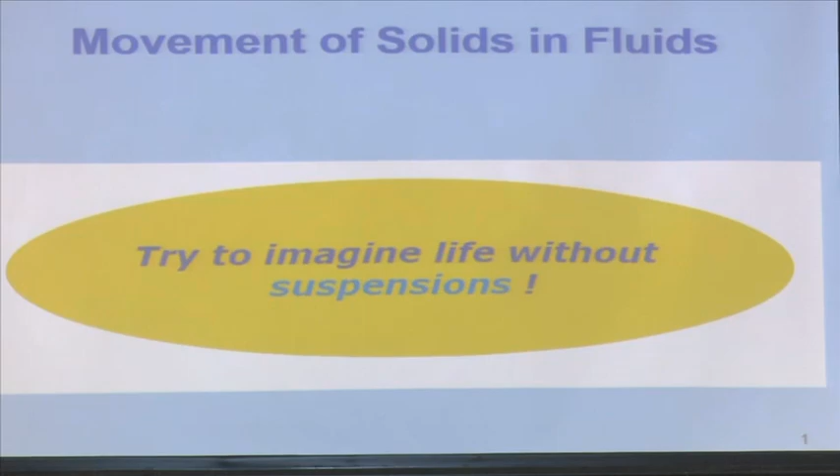If I do not understand this, I do not understand how any separator works. There is a bit of fundamentals, that is the physics behind it, but my focus will be more on what kind of models I should select for calculating properties of the solids in fluids. So, to give you a broader sense of the areas of application of this topic, I would like you to imagine your life without suspensions. Probably at one go you are not able to understand what I mean, but in the next slide I will try to show some examples, broad areas of application of suspensions.

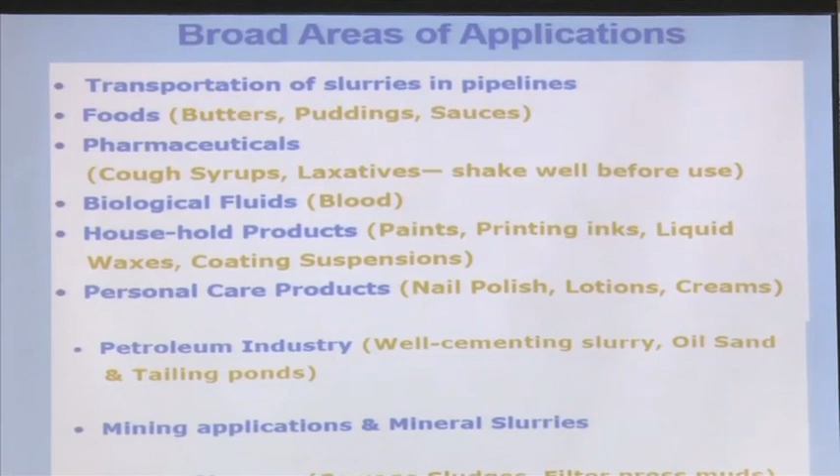Transportation of slurries in pipelines. What are the basic requirements? If I want to transport material from one point to another through a pipeline using a fluid medium, the particles should not settle. Otherwise you cannot transport it, you will have difficulties.

Foods like butters, puddings, sauces. When you have sauce, why is there an expiry date? What happens to the sauce? You will find that the particles have settled, and you are having a solid liquid separation, but you do not want that. So what I am trying to say is that we are also essentially dealing with some kind of suspensions there.

Look at pharmaceuticals, as we discussed one day, cough syrups, laxatives, shake well before use, shaking is required to bring it into suspension.

Even look at our biological fluids, blood. Blood is also transporting particulates, we have got WBC, RBC, and all this. I will show you in the next slide also, and the one after that.

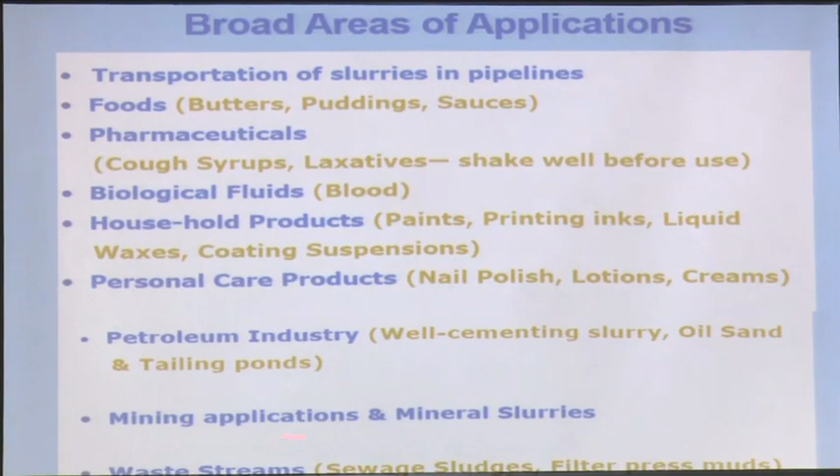Household products like paints, printing inks, liquid waxes, coating suspensions, everything has to be a suspension. So the essential thing is that particles should be in suspension, but how do I make them suspended if I do not know the physics of movement of solids in fluids. Personal care products, nail polish, lotions, creams, petroleum industry, I can keep giving examples, but our domain is mostly on mining applications and mineral slurries.

Okay, so we will come to that. Before that, I will try to show you what Professor Suman Chakravarti was talking about yesterday, pump and pipeline systems. In processing industry, we need pump and pipeline systems mostly for slurry transportation. How do I send my material from one unit to another unit? We need a connecting tool, that is the pipeline.

So, in the form of slurry, that means a mixture of solid and fluid, I give this analogy to our processing plant with our human system. Even our human system, I will say it is a mineral processing system. If I look at it, probably you remember my introductory lecture on mineral processing. Now we are taking food. In terms of processing industry, we call it feed, doing the same thing, feeding our system, that is our food.

Okay, now what do we do? If we do not have teeth, if we do not crush them, what will happen? There will be choking. So now we are basically trying to liberate, or we are trying to do size reduction with our teeth. And you see our jaw, probably the name jaw crusher has come from this. I do not know the history of that, but probably I am guessing. So we are doing the same thing, but if you just keep it between your teeth, nothing will happen to a solid particle.

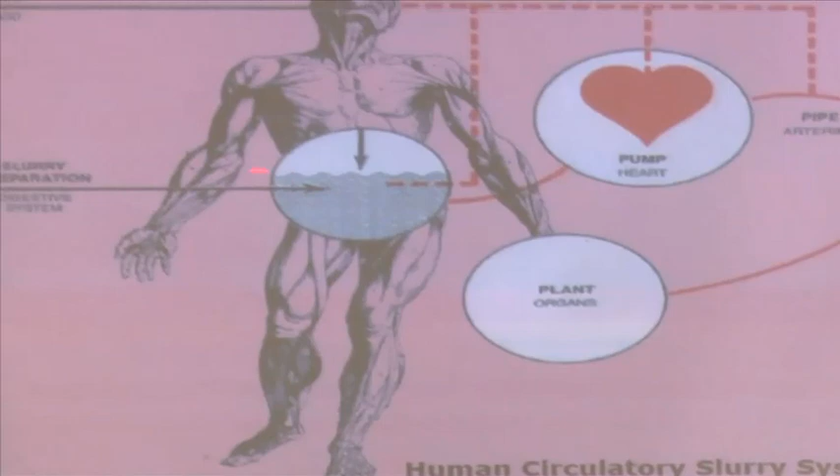That is what we call a slurry preparation system. Let's suppose I have to add chemicals for my flotation process, and I want to ensure they are properly mixed. Normally we use a tank and a mixing mechanism so they are properly suspended, and then they are fed to a particulate separation unit. That is called a slurry preparation unit.

Our digestive system is also nothing but an analogy to this - here we add chemicals in terms of some acids and enzymes to help complete the process.

We have fixed some residence time for a particular type of material, so it is automatic. We want to bring this automation into our processing systems too - that is our challenge, what we call modern plants. But our body already has an automatic system.

If there is a malfunction in any system, we go to doctors - they repair it. They are nothing but engineers too. They play with our human body, we play with machines. So it is also a machine.

Then what happens? Then you pump it. Material has to be transported. Some material is transported because of gravity, that is fine. But what is my transporting channel? It is my arteries and all this. Where is the energy coming from?

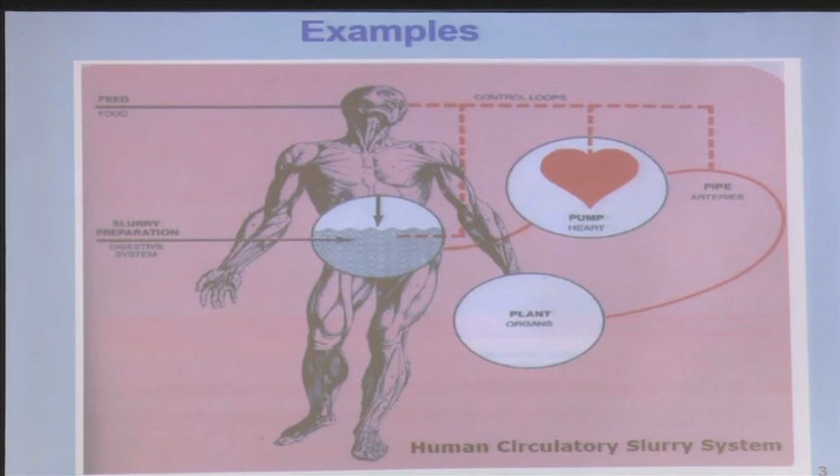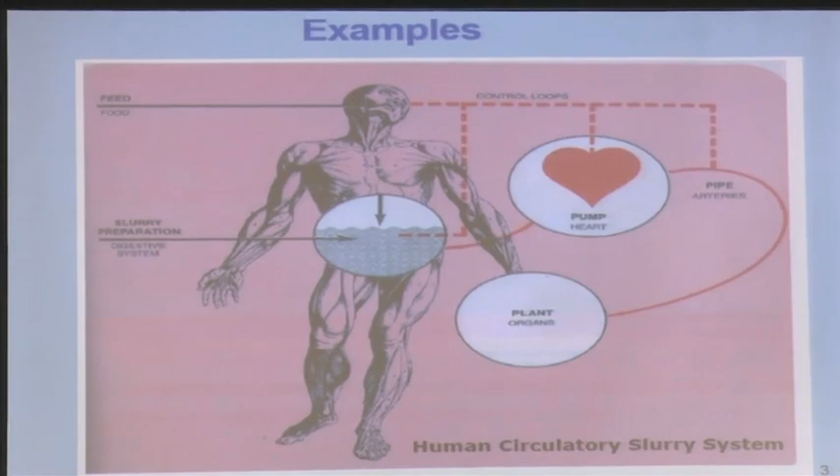If I understand this system properly, I can understand slurry preparation and the entire pump and pipeline designing system. That is why yesterday Professor Chakravarti ended his course by giving you a problem - designing your pump and pipeline system. There is no fixed rule, you can have your own designs with some basic calculations. That is the project he has given you. He even said it is valid for our human circulatory system too - that is why he said this.

Now if I understand this system properly, I can also design a pipeline system for my processing plant, for my petrochemical plant, for anything. So if someone is interested in biology, we will look at this system also, how things are transported. I leave it to you.

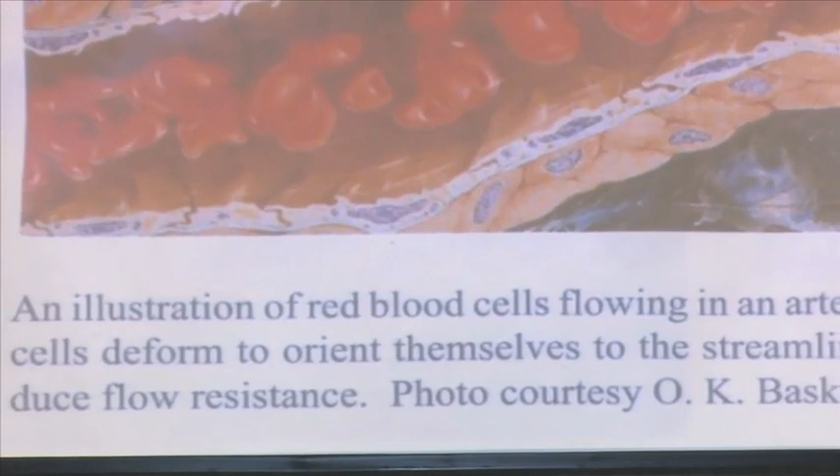Next, if you look at our blood, blood is also basically a suspension. It is transporting particulates - RBC, WBC, and so many other cells, enzymes and all this - some form of particulates.

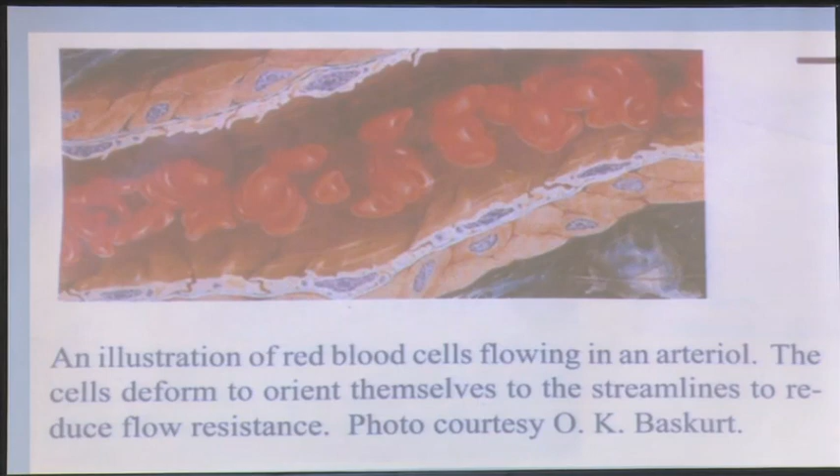Now what happens when you have some kind of chest pain and all this, then we go for angiography or something, and they say there is a blockage. What is blockage? It means this channel, which has a diameter for transportation, now if the diameter is reduced, what will happen? There will be pressure on the wall of that channel, and that wall can sustain only a maximum limit of pressure.

So beyond that, what will happen? It may burst. Another thing is it may fail to supply essential ingredients to my body at the rate it should. So I may have other problems, and to overcome this, what will happen?

My heart will start working at a much higher rate than what it is designed for. So what happens if it overworks? There is a possibility it may fail. So I may not have a direct problem with the heart, but if there is some problem with my arteries, it affects my heart.

So now what happens, what could it be? If the viscosity changes, then my flowability could change. What are the reasons for viscosity changes?

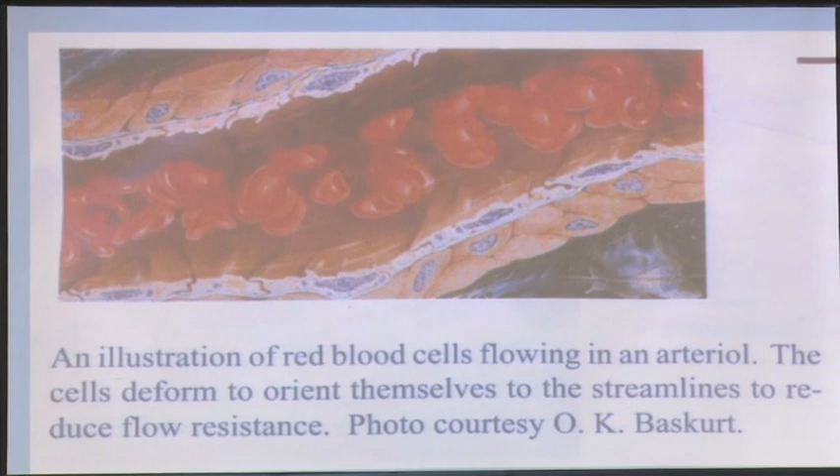Anyway, now I am coming to the slurry transportation thing. I have to transport my material around 500 kilometers, 700 kilometers. These days, Coal India is planning to double production by 2020, to 1 billion tons. But I asked in one closed door meeting where railway people, NTPC people, and Coal India people were there - I asked that very top person from railway, is railway also gearing up for the transportation?

Because when your production is doubled, who will transport the coal? Railway said no, we don't have any plan. Then even if you produce it, how are you going to deliver it to your NTPC or your client store? So you have to find an alternative mode of transportation. Now how are you going to transport 500, 600 kilometers, and suppose the road and rail lines are not viable, then you have to think of pipeline transport or some alternative mode of transport.

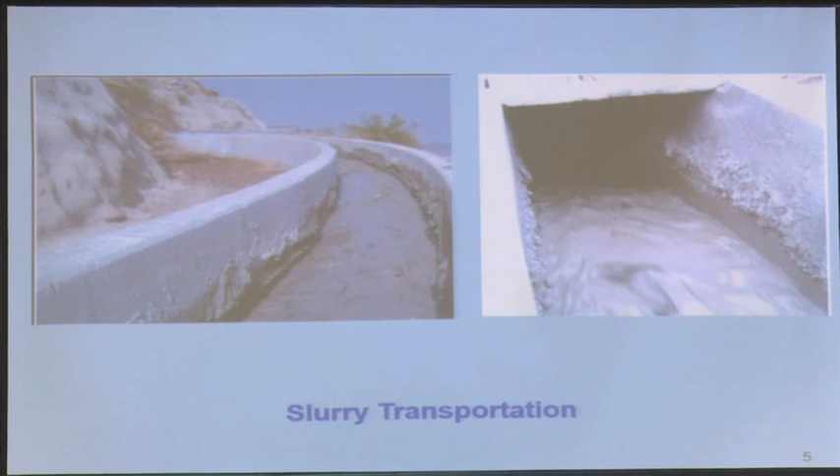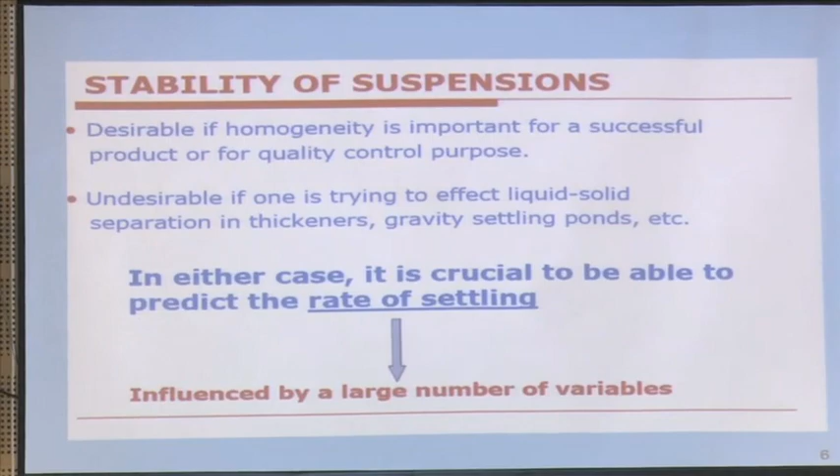So in that case, if I want to transport, the material has to be in suspension - but how do I keep it in suspension? What should be the design? The essential feature, the heart of this, is that I must know what is the particulate behavior in a fluid. Otherwise I cannot start with the calculations or the design. So the stability of suspensions - many times I don't always want my particle to be in suspension. Many times I want to know how quickly they get settled, like your solid-liquid separation cases, where I want the solid to be settled as fast as possible. But in any case, I must know how solid behaves in a fluid medium.

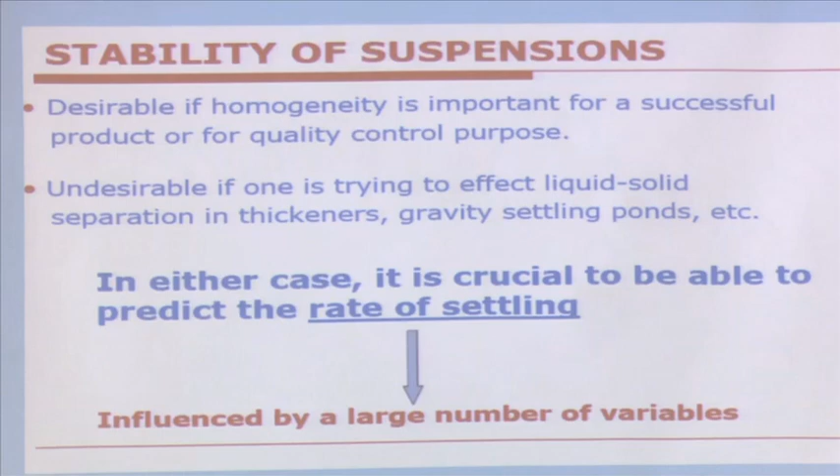Are you convinced? So this is what we are going to talk about - our scheme is that in either case it is crucial to be able to predict the rate of settling, whether I want particles to be settled or whether I want to keep them in suspension. This essential calculation, this essential understanding, we must have. Now this is influenced by a large number of variables - this is not so simple. So what are those variables? We start with the general scenario.

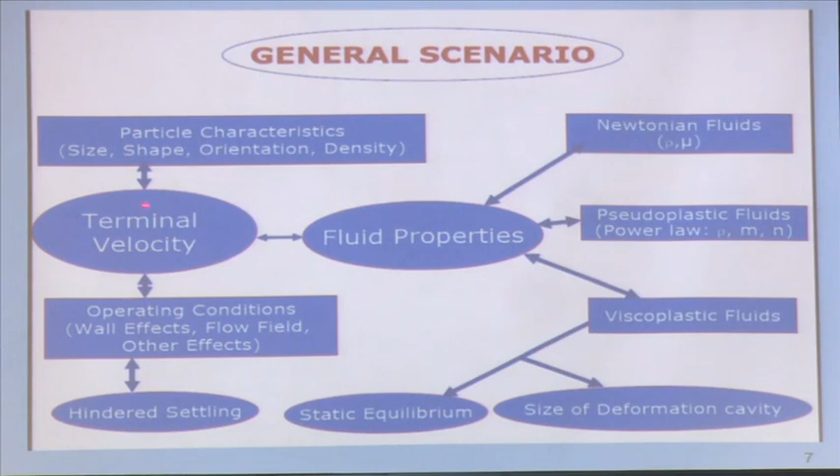What influences them? Basically the particle characteristics - size, shape, orientation, and density. Then what we are interested to know most of the time is the terminal velocity - we will talk about what terminal velocity is. And then this is also influenced by your fluid properties - fluid properties meaning what type of fluid it is.

Like your sauces - many times when you want to use it, even if you have tilted it, even if you are putting pressure, you find the sauce is not coming out. Many times in the morning when dealing with toothpaste, you find the same thing happening, it's not coming out. Then what do you have to do? For sauces mostly, you have to do like this. What is that you are doing? It has got some residual stresses, and you are basically overcoming those residual stresses, then only it will start flowing. That is the property of that particular fluid.

It is called Bingham fluid - it has got residual stresses. So what kind of fluid is it?

Now, if I want to do, if my area of work deals with sauces or similar fluids, then I cannot use the formulas I use directly for water.

Whether it is a Newtonian fluid, a pseudoplastic fluid, or a viscoplastic fluid, please look at the textbook, we do not have time to discuss all of them.

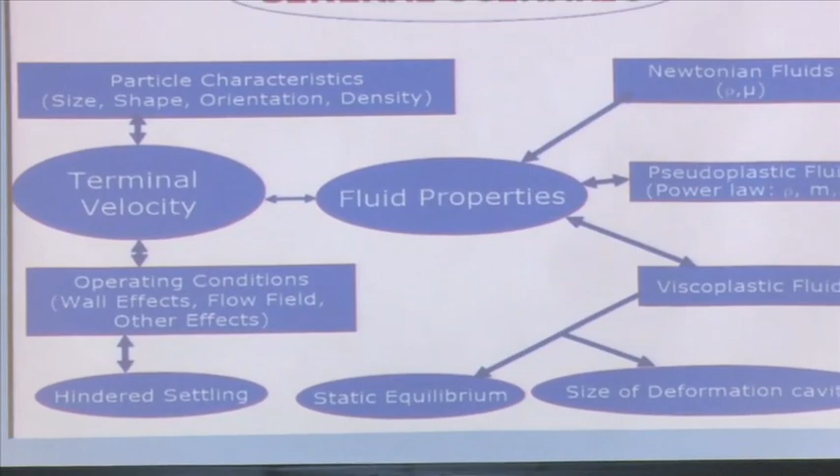Then the flow field, what type of flow field it is, whether the fluid where it is settling is moving or static. If it is flowing, whether it is laminar flow or something else.

Whether it is turbulent flow, whether it is transitional flow, what kind of flow it is, that will also disturb the settling behavior of my particle into that medium.

So I must know that. Then whether it is, then other effects, we will discuss what are the other effects.

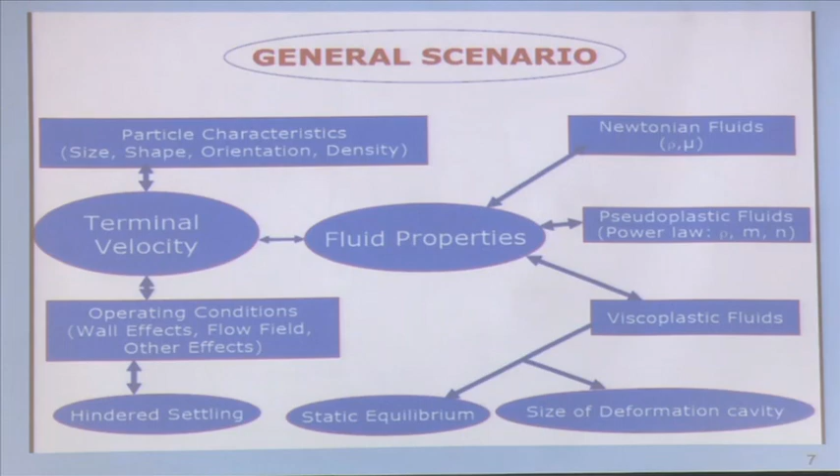Then hindered settling condition, hindered means whether there are very few particles or a very large population of particles. We will discuss more on this, what is hindered settling and all.

So, to understand all this and to limit this discussion, we set boundary conditions, because this is a very vast subject, but I just want to give you the basic concepts.

And in light of this, we will discuss our separating equipment. I always look at my separating equipment based on this settling velocity.

So, here the objective is to develop schemes to predict the settling velocity of a particle of known shape.

So, I have cut short many things, you know. I have eliminated many difficulties.

Known shape, size and density, in a stagnant liquid. That is also another modification I have made, when the fluid is not flowing, of known properties.

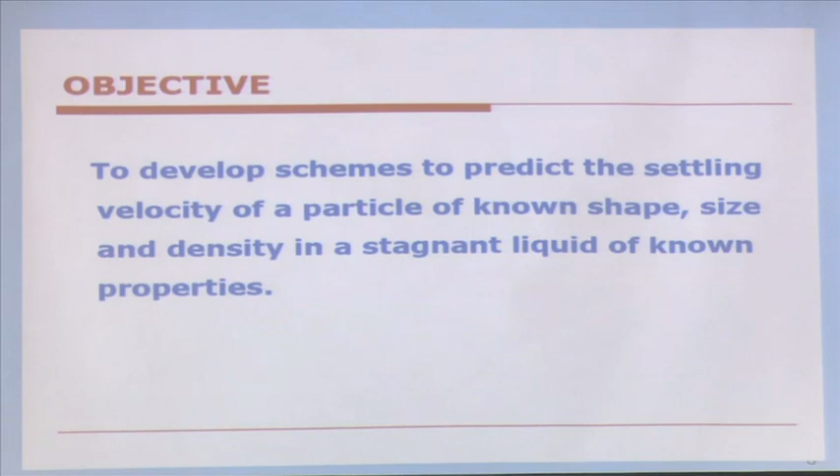Now, the outline of this presentation: I will deal with spherical particles, also briefly deal with non-spherical particles, then concentrated systems.

I will not be dealing with the very fundamental physics, but I will deal with only that much physics which is essential for me to understand, to select a particular model or what I should do in my plant conditions.

So, this is more of an industrial application oriented selection or discussion of this topic. Now, I start with the very basics.

Suppose I have a still liquid and I have a spherical particle, and I let it move into that. So, what will be the forces acting on it?

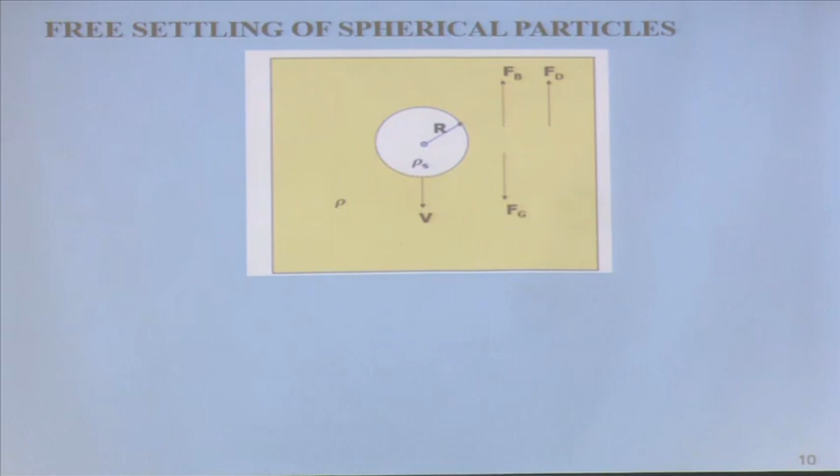There will be three forces acting on that: one is your gravitational force field working in the downward direction, and there will be the buoyancy force going upward.

Buoyancy coming from where? What is buoyancy?

Due to the displacement of the fluid in a pressure gradient, because it will displace an equal volume of fluid. So, there will be a pressure gradient caused.

So, there will be a force for that, that is called the buoyancy force. This is much more complicated, there is another force, called the drag force.

It is due to the relative movement, because the particle will be displacing the fluid, but the fluid is moving in an upward direction while the particle is going downward.

So, there are two layers and I have friction. It is nothing but the frictional component of that.

So, the nature of that friction will depend on my particle characteristics, how big the particle is, what density it has, because how much fluid will be displaced will be a function of that.

And if the particle is moving at a very faster rate downward, the fluid also tries to go up at a very faster rate. So, I will have a different type of friction.

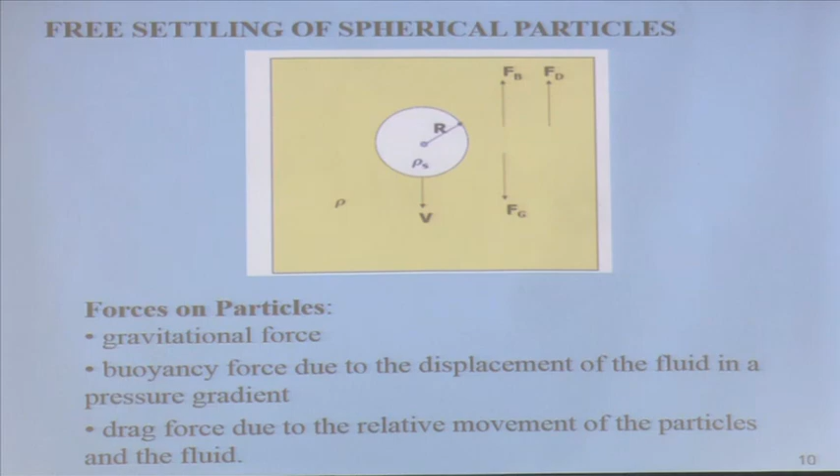If the two vehicles are hitting each other from opposite directions at different speeds, then the degree of fatalities will be different. But here there is no collision, there is a shear. So the nature of the drag force will be different. This is a function of the flow conditions, which I will come to.

Now if I want to write a mathematical equation for the motion of a particle moving into that fluid, I can write m as the mass of the particle, dv by dt as the acceleration term. It is basically F equals ma, that is mass into acceleration equals all the forces. So ma is m dv by dt, and mg is the gravitational component going down. These positive and negative signs show the direction of movement.

And minus mg, that is your buoyancy component, how much will it be? That is a function of your fluid density and particle density.

Minus this CD, this is called the drag coefficient. That is how I measure the drag, and for that I need the friction coefficient, but in this case we call it drag coefficient. Drag is also of various types, but I am not going into that detail—chemical engineers have gone through much more detail—but for my application point of view, this is how much I think I must know to start with.

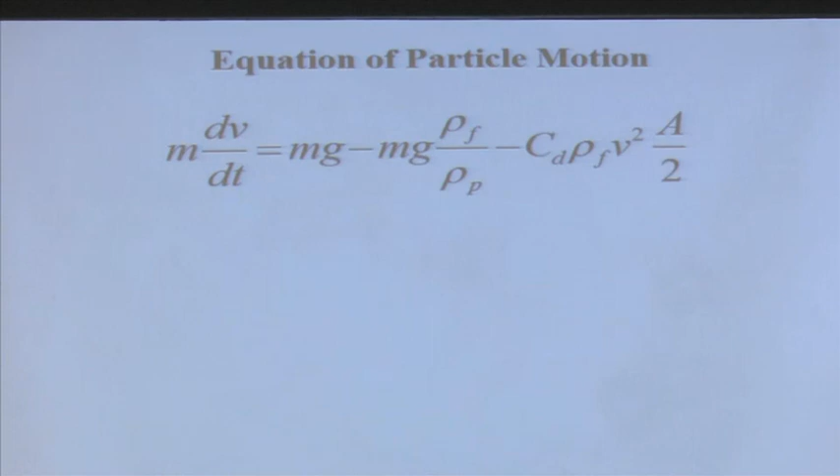Rho f is the fluid density, v is the particle velocity, a is the projected area of that particle—I am not saying it is the size. Projected area means, if my bottle is going in this direction, what is this area in contact with my water—that is the most important thing, that is what is causing my drag. But if it is oriented like this, then this different dimension is the projected area. So it is a function of the orientation also.

Now if we simplify it, say that dV by dt—I show in my lecture on gravity concentration how much time this normally takes. What happens is, when a particle starts moving into a fluid medium, it normally has an accelerating velocity following that first equation, but after a certain time it reaches a steady state, called the terminal settling velocity. If we deal with this terminal condition and how much time it takes to reach that, I will show you in my density separation lecture, because there is a reason for that.

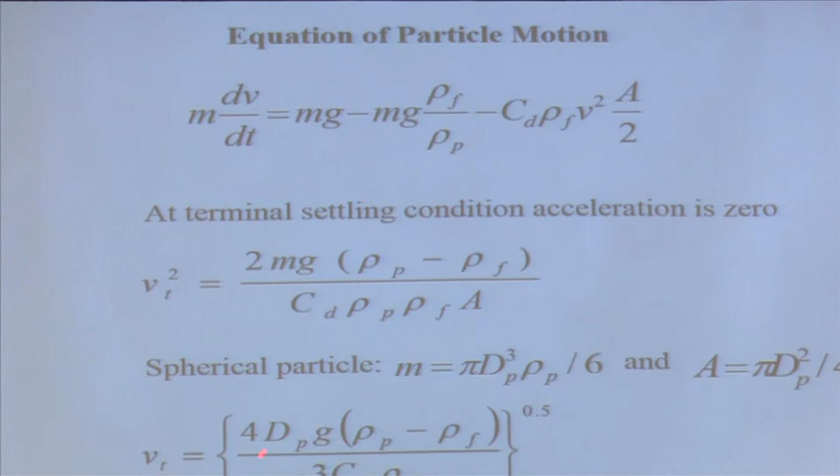If I put these values into that equation, I get a form like this: Vt equals the square root of [4 dp g (rho p minus rho f) divided by 3 Cd rho f]. You all know probably up to this. So that is the general formula we get for a spherical particle.

Now again, the Cd is basically, say I have got only one equation and I have got two unknowns. I want to know Vt, but for that I must know Cd. So how do I solve? I cannot solve, mathematically it is not possible.

So that is the challenge, how do we find Cd? Now, as I said, the drag coefficient is what? It is basically the relative movement of my particle and fluid.

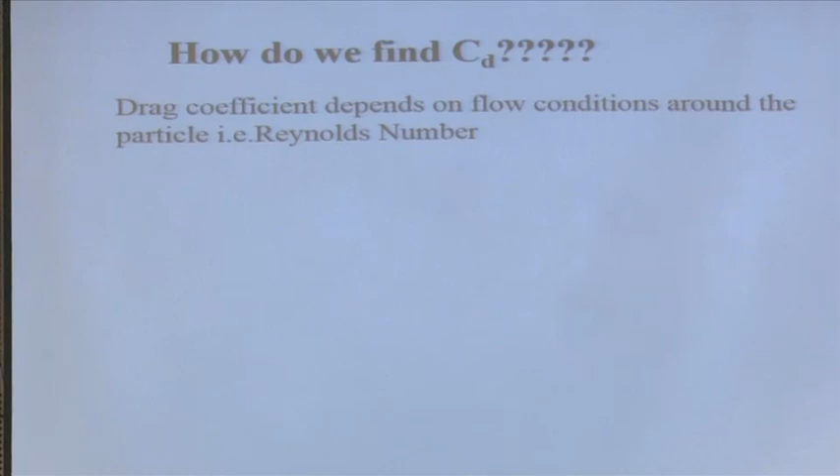I give this example to you, that suppose I have got a water body, and if I throw a very little particle into that water body, will it disturb the entire water body? Will you be able to see any wave coming or something like that? It will just dip, isn't it? But if I have a very big rock mass and if I am throwing it there, what will happen? The entire water body will be disturbed, there will be splashing and everything.

So why did this happen? Why did the small particle not create any disturbance, even not noticeable, but the bigger particle will draw the attention of everyone nearby, something happened. So the nature of the disturbance into the fluid medium is also dependent on the nature of the particle you have put into the system, isn't it?

So when you have dropped a very big particle, the splashes go in all different directions, can you predict it in mathematical terms? That is nothing but a turbulent condition. So what type of Cd will be there? That is also dependent on what type of particle you are dealing with and what type of fluid motion it has created. So it is relative.

So drag coefficient depends on flow conditions around the particle, that is the Reynolds number. Of course, we can express it as Vt rho f dp by mu f. Vt is again the terminal settling velocity. Now that is what I am interested to know. Vt I am interested to know, and by Reynolds number I have introduced, but that also has that component Vt, so I cannot solve with that. And rho f is the fluid density, dp is the particle size.

Now the fluid property is coming, that is the viscosity of the fluid. When I talk about viscosity of the fluid and the density of the fluid, I must also talk about the temperature of that fluid. So that also changes. So I must describe all these conditions. But some of our very well renowned scientists have eased our problem a bit because of their research and findings which are in the textbook. So you are all familiar with Stokes.

In our IIT Kharagpur there are at least 6 or 7, maybe more professors working on Stokes flow, mostly in the mathematics department. Even the nature of Stokesian flows is their research area.

So Stokes flow, we are simplifying it for application purposes, but it is not that simple. We call it the Stokes or laminar region.

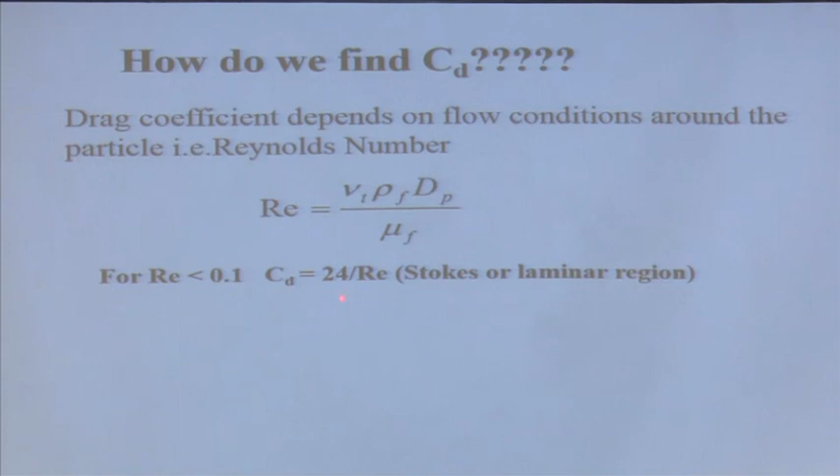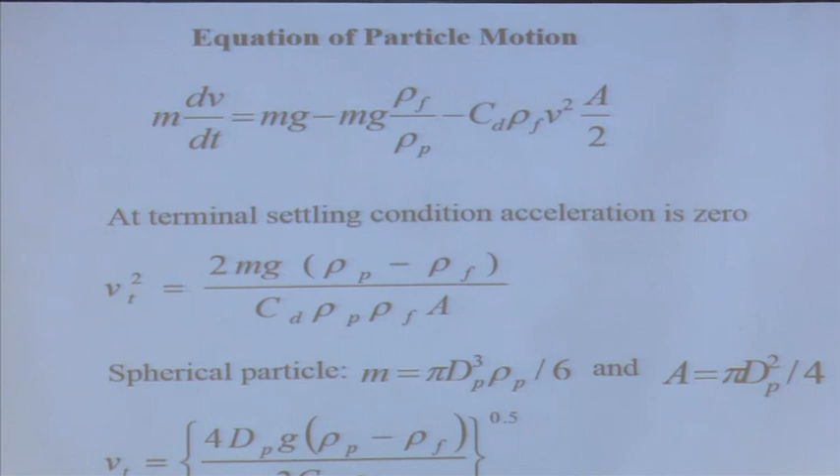So now for this, if I take CD equals 24 by Re, please note down this final formula. Here if I put CD equals 24 by Re, that is 24 by rho V d by mu, then I can get to know all the values. So what happens in that case? I get Vt equals G dp squared times (rho p minus rho f), divided by 18 mu f.

Please derive all these steps if you are not familiar with this, but many people in this audience may be getting bored because I have started with very basics, and they may be doing research at a much higher level. But I know the background of the people - for some it may be new, for some it may be very basic.

So now I can calculate - but there is a condition: this equation is valid only if the Reynolds number is less than 0.1. Now I can calculate everything because every parameter I know. But in terms of particle size and density, what does Reynolds number less than 0.1 mean?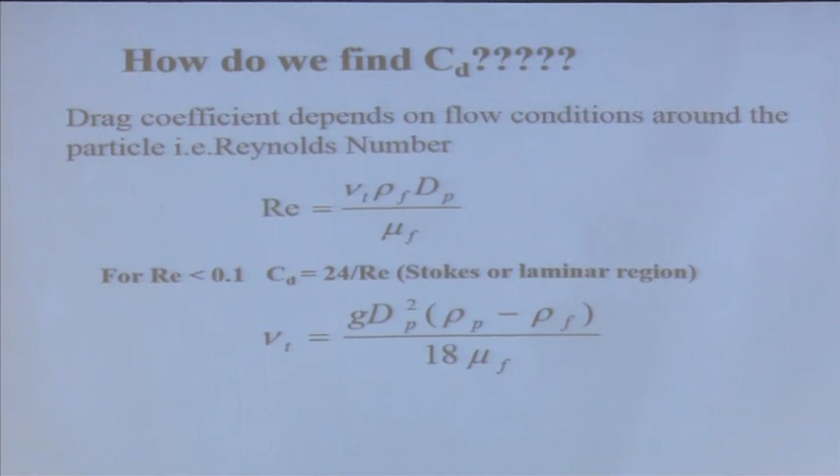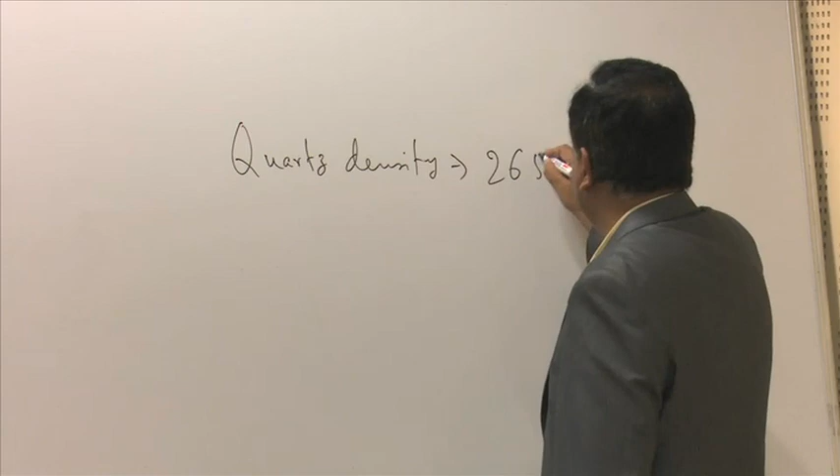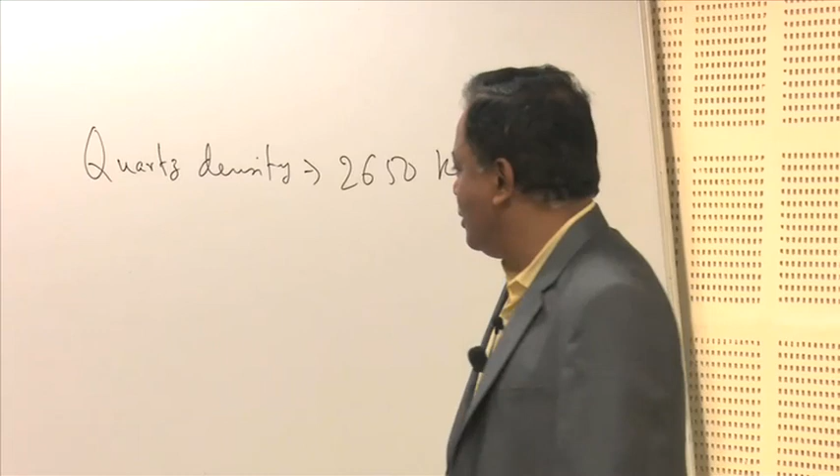Now basically, when I am mentioning size, I have to mention the density, or if I am fixing the size, I have to fix it to know the density. So it is called the quartz density particle - that is 2650 kg per meter cube. So if I am dealing with a quartz particle, Reynolds number less than 0.1 is applicable for a particle size less than or equal to 50 micron.

Are you getting what I am saying? So this is when I can use Stokes law - I cannot just arbitrarily use it. Stokes law is valid only for viscous flow, and viscous flow corresponds to a Reynolds number range up to about 0.1.

That is why many textbooks and articles even deal with Reynolds number up to 2 - when you increase the limit, you're also increasing the size limit. But the majority accept Reynolds number 0.1. It may happen that up to Reynolds number 2 it is still Stokesian flow, but then you have to do experiments to check whether it is really streamline flow, and you have to prove that first.

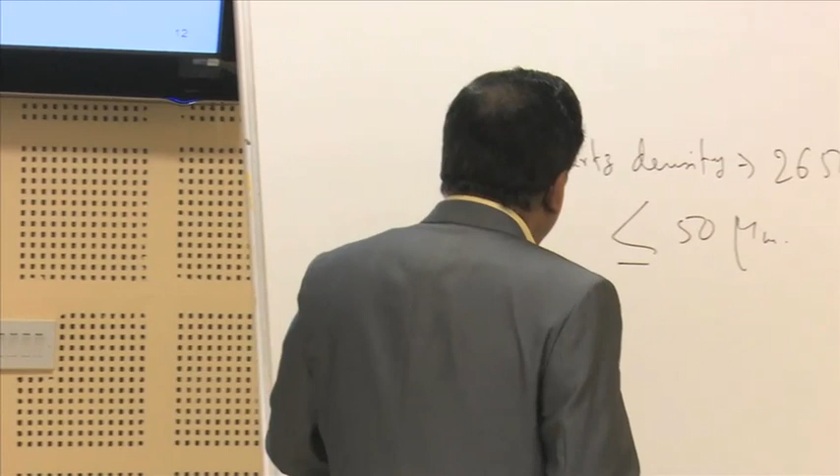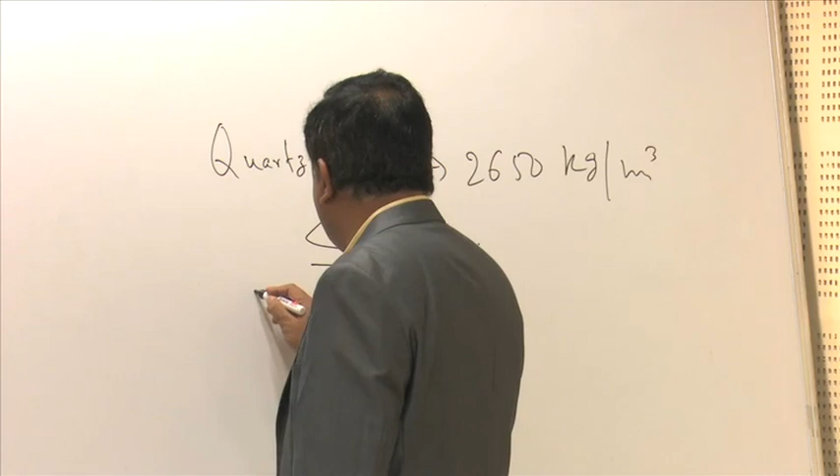So if I have a particle with density of 2650 kg per meter cube, I can apply this equation if my particle size is less than or equal to 50 micron. Now if it is gold density particle, what happens? What is the gold density? It is around 19,300 kg per meter cube.

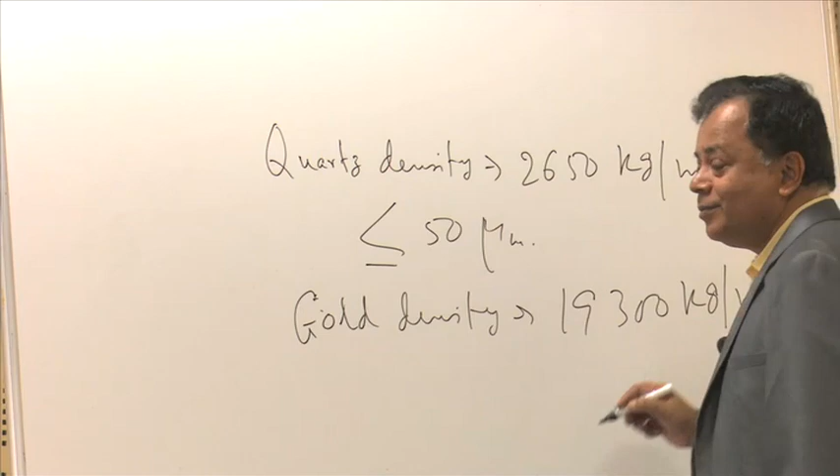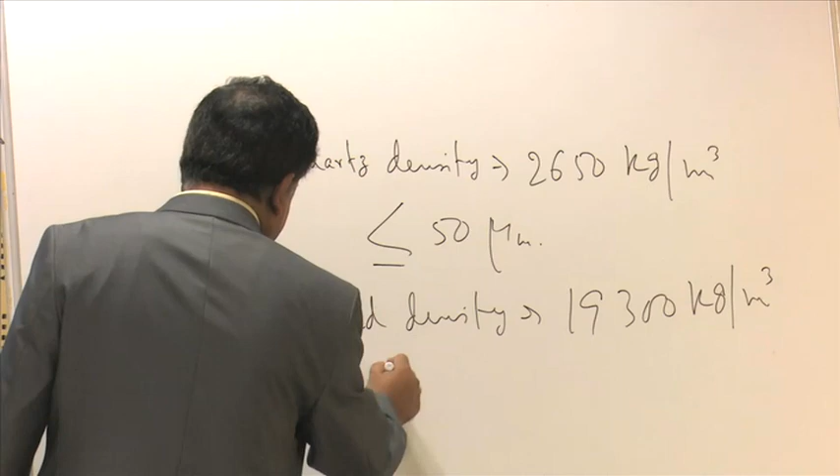When my density is more, remember Reynolds number is equal to rho V d by mu. So, rho is more in this case, so my d will be much smaller. That is what the calculations, as an assignment I will give you, or maybe in the exam I will give you, and that I can easily calculate from this equation, is it not?

Now, if I say that a gold particle and a 50 micron quartz particle are having equal settling velocity, that means they are having identical velocity in a still fluid, what is the size of the gold particle? Unless and until we calculate it, it is very difficult to tell, but I guess it will be around 15 to 18 micron.

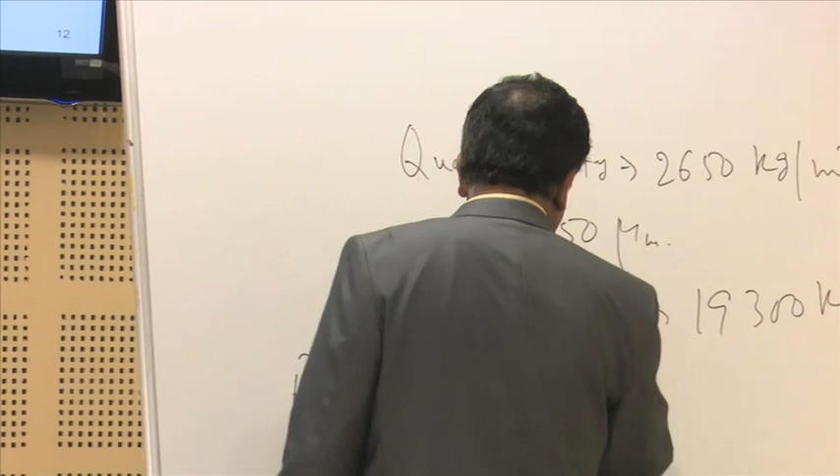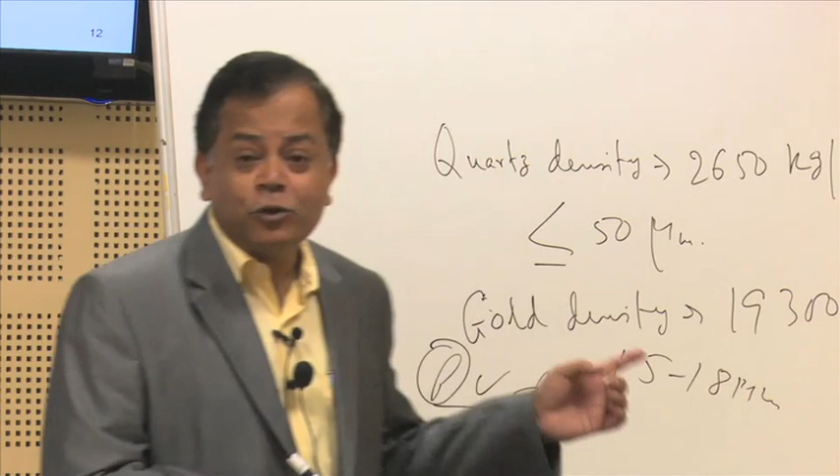So that means if I am dealing with gold, I am not sure, I have to calculate it. I cannot say that since less than 50 micron it will be Stokes, no, that is for quartz density particle. Now you are dealing with gold particle. Now if it is coal, coal density is less than this.

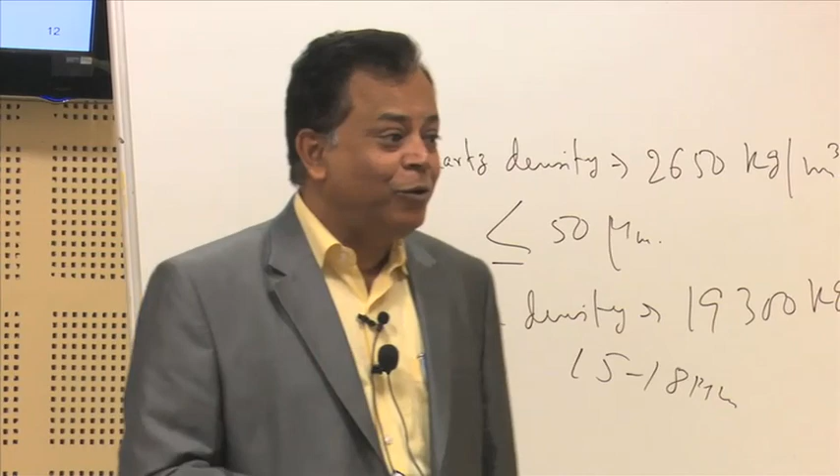So from my sink float analysis, if I want to know what is the settling velocity of this particle group, say suppose that is 1500 kg per meter cube of those particles, then I can calculate. So this will be coarser than this, but how coarse? For that I have to calculate this. These are the applications, okay.

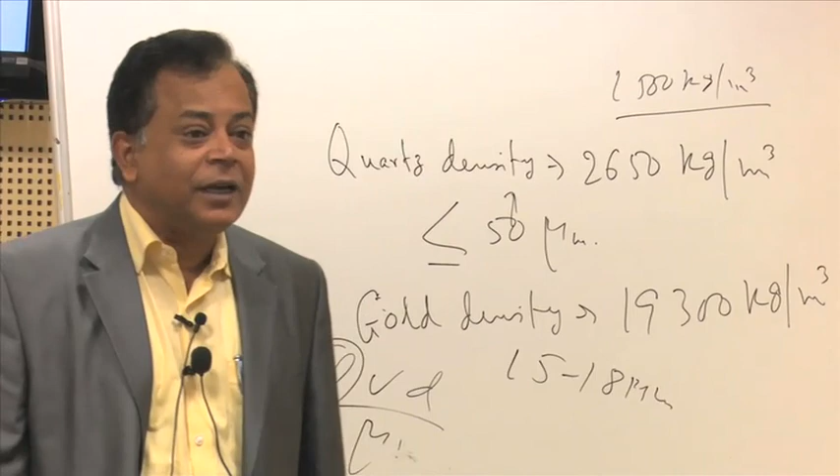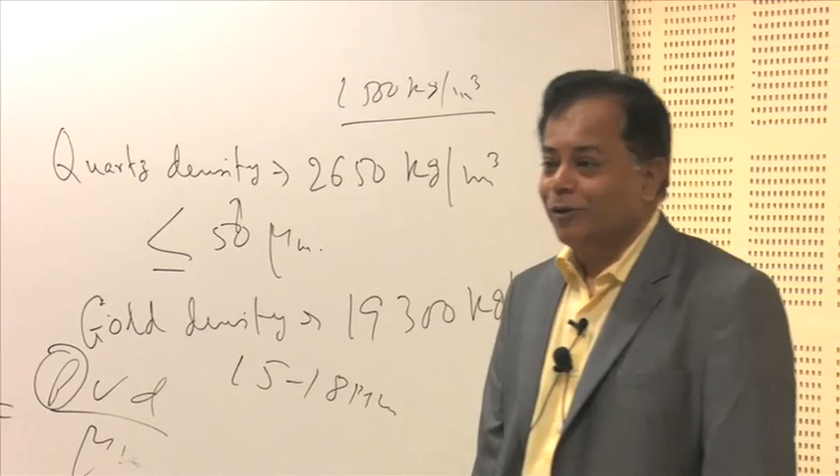That is where I can select, but normally we are being taught Stokes law, use Stokes law. No, arbitrarily you cannot use the Stokes law. You have to first prove what sort of particles and all this. So that is for Reynolds number less than 0.1, that is for quartz density it is 50 micron.

There is another scientist, probably you have heard. Who has not heard his name? Please raise your hand. This next gentleman's name, Newton.

So this scientist said, it is also his experiments and all this. Actually this is the consequence, or many times when I am listening to someone's lecture, that is why I said at the beginning that you must know my background, from what perspective I am giving these lectures. You must know the background of a person when you are listening to him.

So the background of Stokes was that he was basically interested only in this very fine size range. Most probably he was working in a pharmaceutical company. In a pharmaceutical company, you deal with very small particles, you do not deal with very large particles, and that was his requirement to solve his problems. So he dealt with that, and this may be a byproduct of that, that you have come out with this type of relationship. Now, Newton probably was working on very large particles.

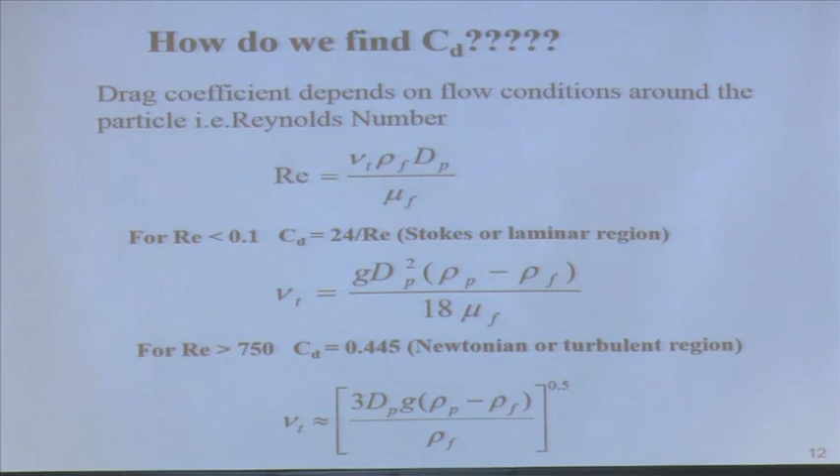So now we have got two models by two reputed scientists, Stokes, but you see the range. I have got a value for Reynolds number less than 0.1, and I have got a model for Reynolds number more than 750. Now what does Reynolds number 750 mean in terms of particle size? Again, for quartz density particle, the Newton size is 5 millimeter.

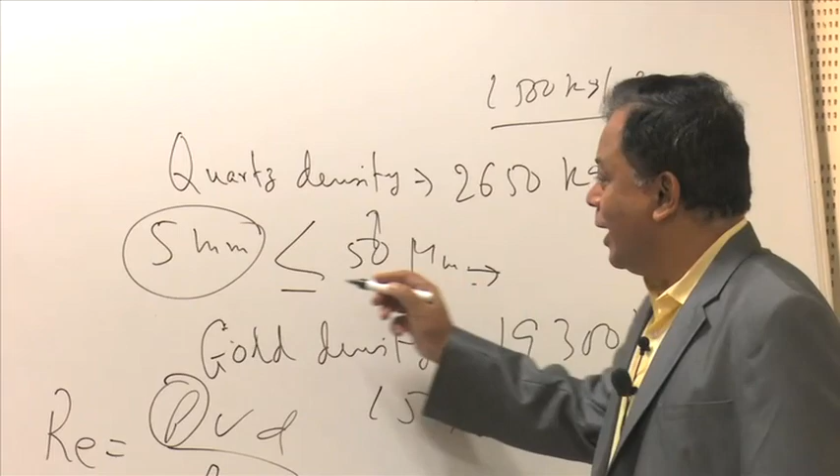So, 5 millimeter or coarser than that normally. If you calculate the Reynolds number for that range, you will find it is more than 750, though it depends on fluids and other factors. So we have got a model for less than 50 micron and greater than 5 millimeter.

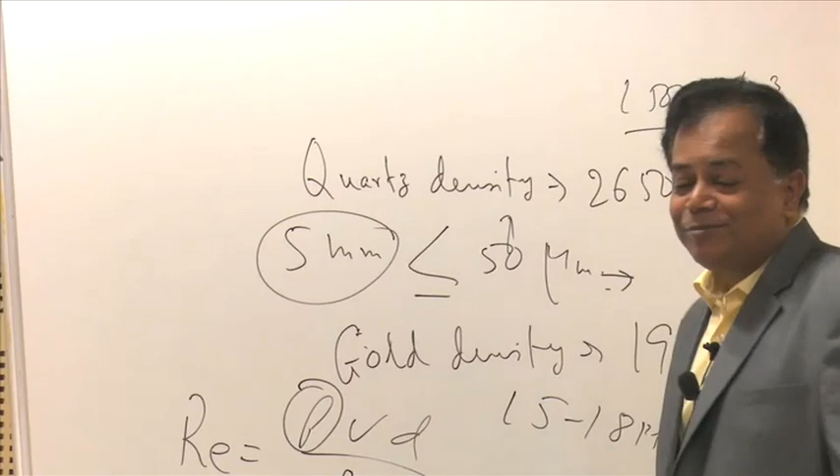But most of the cases, the examples given earlier, most suspensions, even in mineral processing and fine particle processing, are basically the problematic area. Below 50 micron we happily call these slimes, put a desliming step in, let it go out of the system, and do not deal with that. So essentially, major engineering applications are in between 5 millimeter and 50 micron.

So which equation should I use for that? That is the challenge, and that is the focal point of this discussion, because otherwise everywhere you get the Stokes equation and Newton's equation in any textbook. That is where a little bit of my contribution is there also, in the review I made of which model I should use.

Even this is called the transitional range. Many different people use different models. I even had a lot of debate with Professor Eric about why he uses a certain approach. He has got some logic, but I am not convinced. Now let me discuss my point, how we should do it. It is all published, and people are using it.

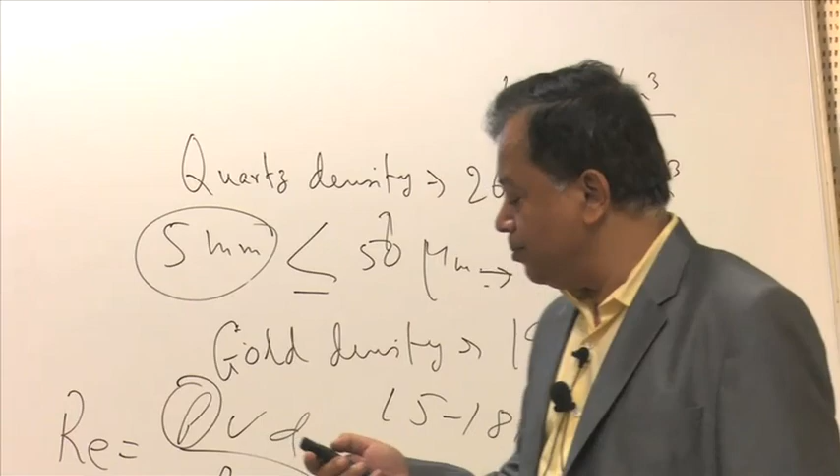So, transitional region, how do I approach it? There are many single equations proposed for this transitional region. Great people worked on that, many of them.

The literature is flooded with chemical engineering contributions, by renowned chemical engineers, editors of chemical engineering journals, real stalwarts in the field. Lapple and Shepherd proposed a drag curve, because many people were publishing articles claiming a particular relation between drag coefficient and Reynolds number for their own system. What these two famous chemical engineers did was first rigorously examine the experimental setups, since these are mostly measurements with not much theory involved.

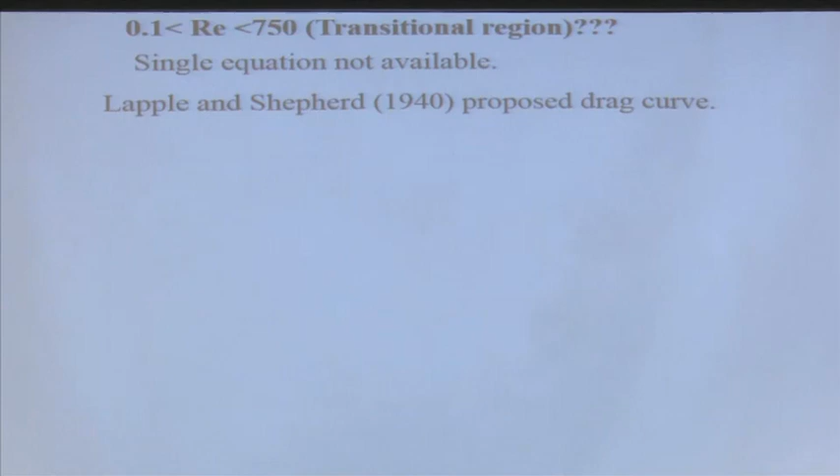They checked whose experimental setup and data set was believable and reliable, then combined everything and plotted it in the form of particle Reynolds number versus drag coefficient. This is just a review, an example of what I mean by literature review. The literature review should be like this, where you come out with something new.

When I say that if I want to do research, the greatest tool we have is our databases, and it is Wi-Fi enabled across the entire campus. Anywhere I connect to the internet, I can access Web of Science, Science Direct, or whatever journal I want, so I am essentially carrying the entire library with me. What else do I need to do research? Even sitting in the corridor, I can look at journal articles, and if I have a thought process, I can analyze that published data and develop a model. Why do I have to generate my own data?

So many times I ask myself this, and more than 40% of my publications are like that: conceptual, based on literature data, where I have disagreements and have written about them. So 40% of my publications are based on concepts and arguments of this type. I am not claiming that this is at that very high level of work.

So what they did was plot all this data, getting a typical shape of curve like this, and they named it the drag curve. Now the entire community dealing with suspensions, that is solid-fluid movements, has accepted it as the standard. There is no point repeating tests that others have already done much more accurately. Why spend money and time on that?

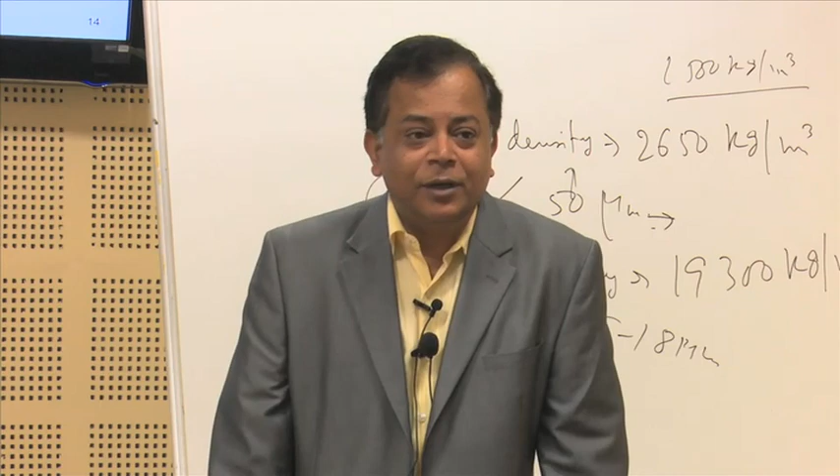So now this Professor Concha - Almendra is his PhD student - published, I remember, 18 or 19 articles in a series on settling velocity. They were published in the International Journal of Mineral Processing as a series. This Concha and Almendra paper from 1979, now many softwares used in mineral processing and coal processing use it, because a single equation is very convenient if I have one for the settling velocity which covers the entire range.

But I will now bring in my opinion on that. I am not challenging it, I am just giving another opinion - all these famous people have done good work, but I would say that I am not going to select my model based on the tag associated with the person who proposed it, rather I will go by the scientific manner. So I will accept the model which can predict that drag curve as closely as possible - that should be my basis of selecting my model.

If I am developing a software and for my designing purposes, settling velocity plays a major role. If you are developing a model or designing the separation process, this has to be the first criteria - the settling velocity. And for that, my accurate prediction, as accurate as possible, is essential.

So for that, my guiding tool will be to look at the basic model - what they have used for the CD and RE correlations - and plot it into Excel to see whether it can match the standard drag curve properly or not. That should be the selection criteria. That is what I did.

So when I looked at Concha and Almendra's paper, they have taken this CD and RE correlation from Professor Abraham's initial paper, the model. Professor Abraham is a professor at MIT - think about what level of people are working in this field because of the vast engineering applications of this basic phenomenon. And when I looked at Professor Abraham's basic equation, that is how you do cross referencing.

How many of you have read a single research article? I am asking the students - how many of you have gone through a single research article? Have you?

You must learn how to read a research article, how to get hold of a research article, otherwise you won't get to know what is happening, what are the developments in your field. You must make it a habit to go through the research articles. Books are okay for basics, but if you want to know what is happening currently, you need articles.

So here the Abraham's model, when I have plotted, I have seen that it may not be visible here, that there is some, it is not getting exactly superimposed even in the Stokesian regions. This region is getting almost superimposed, but it fails to bring this typical shape. So I was not very much convinced even with this, because even a third decimal point disagreement can bring a lot of differences in your predictions, and that has got a huge effect on your processes.

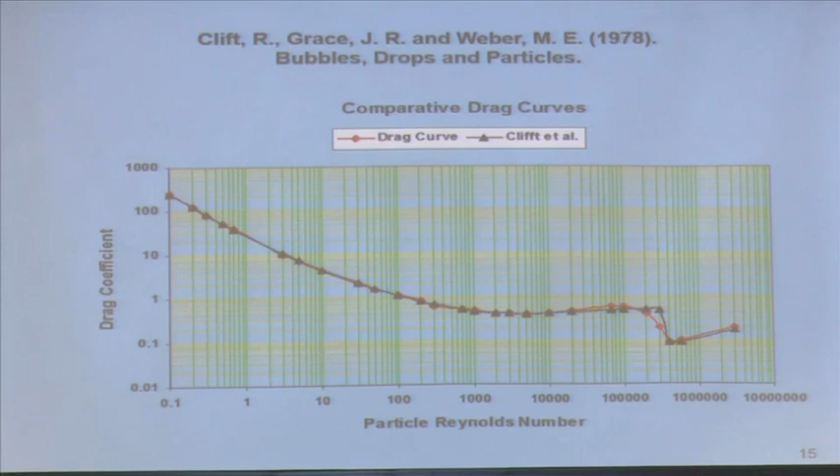Now the question is, again if you look at each relation between CD and Re. My primary aim is to solve Vt, the terminal settling velocity, for which I want to know Cd. To know Cd, that is again a function of Re, and Re is again a function of Vt, rho, Vd. So it comes into a loop, and I am not getting a solution. So I cannot use them to solve directly, isn't it? So how do I solve it?

Then I was looking at fluid mechanics literature, to see if there is any constant available which can predict this. I came across this - I'm not going into detail on its implications - but there is another number, named after the scientist, the best number, which is applied for some other purposes. The best number is written in the form of 4 rho f into rho s minus rho f, where rho s is the solid density, g dp cubed by 3 mu squared. And if I convert it in terms of Cd and Re, it is also equal to Cd into Re squared.

Are you getting what I am saying? That best number I can also represent in terms of Cd into Re square, as well as I can directly calculate the best number from my material and fluid properties, because these are all known, there is nothing unknown.

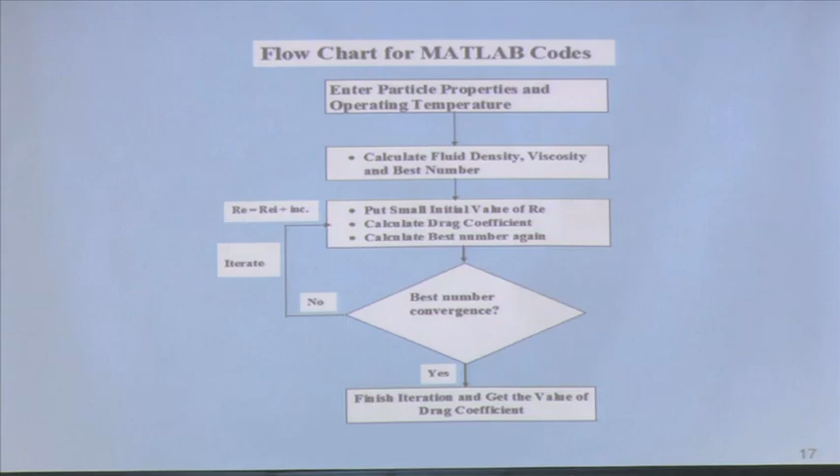Are you getting there? Then the difference between the real value of the best number and this calculated value based on the approximation should be close to 0. So that is my logic: take a small initial value of Re, calculate drag coefficient Cd, calculate the best number again based on the first equation, and check the best number convergence. If my approximated value of Re is correct, then my Cd into Re square and the calculated value of the best number, that difference should be as minimum as possible.

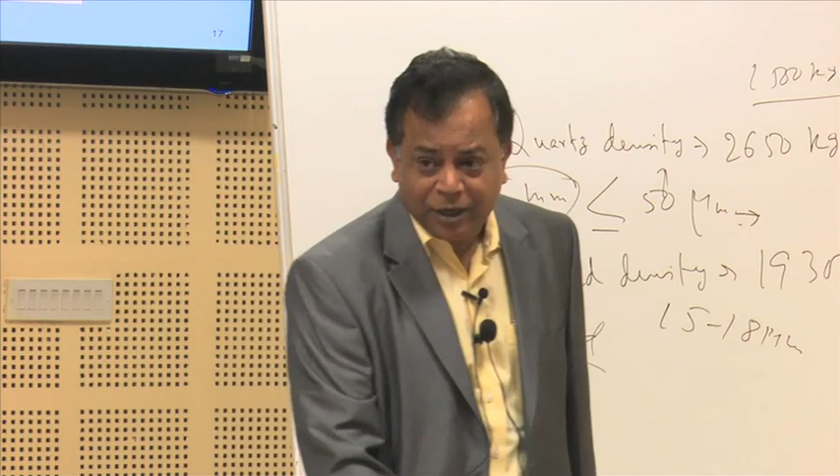But for computational safety, for time-saving purposes, you do not put equal to 0, but you say 0.00000, as you all know if you have done programming. So now, if it is yes, finish the iteration and get the value of drag coefficient. Once you get the drag coefficient value, I can just hook it into the basic equation. I can get the value for my Vt, and I will also get to know the Reynolds number, everything is known. So that is how we can calculate it. Now we have to take a break.